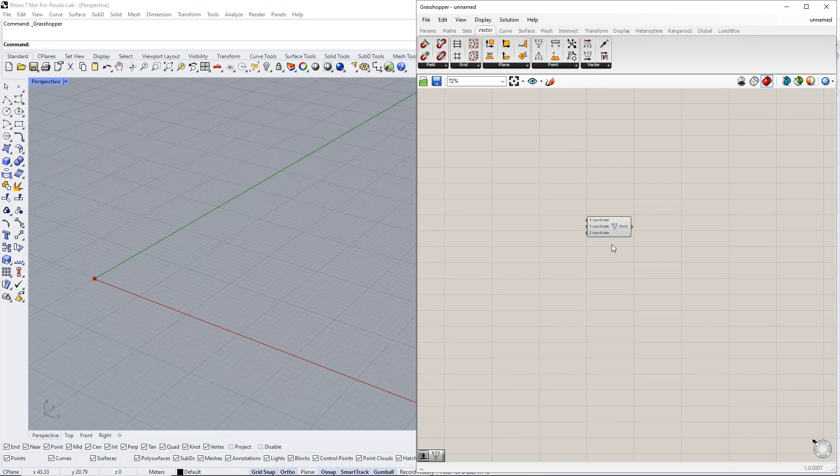First, we create a point using the Construct Point component from the Vector tab. Afterwards, we copy this point twice by holding down the Alt key and dragging the components. For the second, we set up a range to the x-coordinate, for example, from 1 to 50. We then enter width for this slider name.

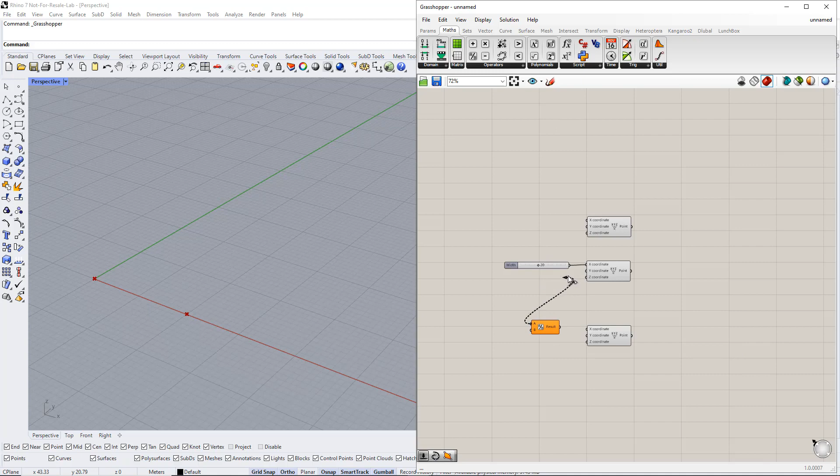We would like to set the third point in the middle of these 2 points, but with variable height. The x value has to be the x value of the second point divided by 2. To do that, we insert the division component from the Maths tab. Now, we connect a to the number slider. For b, we enter 2, using the panel command.

Afterwards, we set up a new range for the z-coordinate, for example, from 0 to 10. After that, we enter height for this slider name.

In the next step, we create a curve from these points using the Interpolate component. You can find it in the Curve tab. Afterwards, we plug the 3 points into this command. Make sure you use the right order, as shown here.

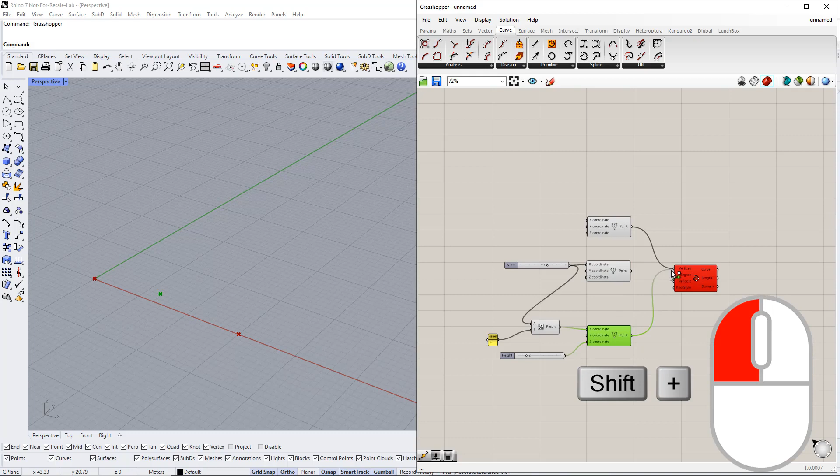We can also define the curve degree using the Number Slider command. We set up a new range between 1 and 5.

Next, we copy this curve in the y direction using the Move component. We also insert the unit vector parallel to the y-axis component. Now we set up a new range, for example, from 1 to 100. Then we enter length for this slider name.

After that, we create a surface through these 2 curves using the Loft component. You can find it in the Surface tab. Then we connect these curves to the curves in the Loft component.

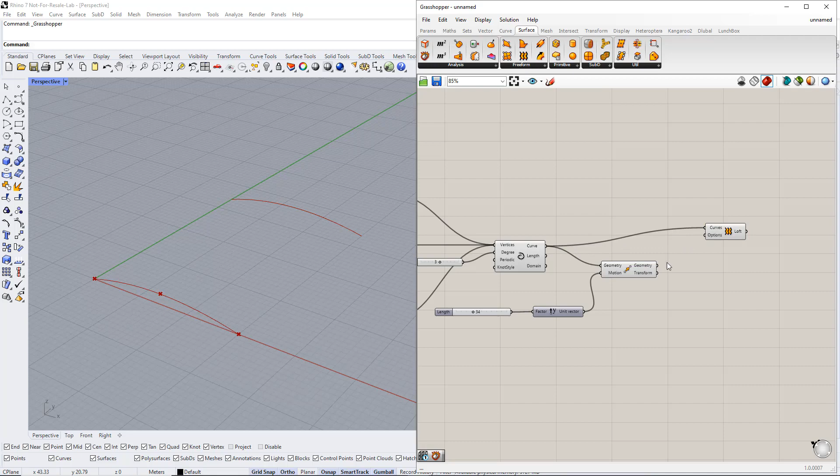In the next step, we create a space truss structure on a surface using the Space Truss Structure 1 component. You can find it in the Lunchbox tab. Then we plug the Loft component into the surface in this component.

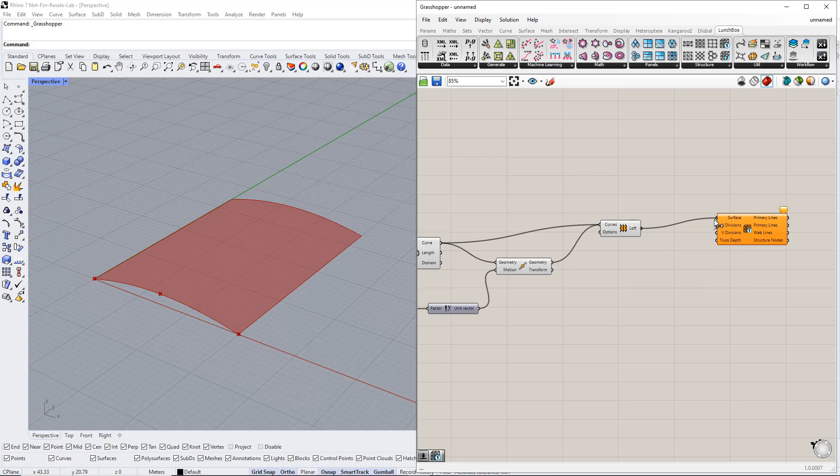We also need to set the divisions in this surface in the U and V directions. For this, we set up new ranges, for example, from 1 to 20 for both directions. After that, we set up a new range for the truss depth, for example, from 0 to 5.

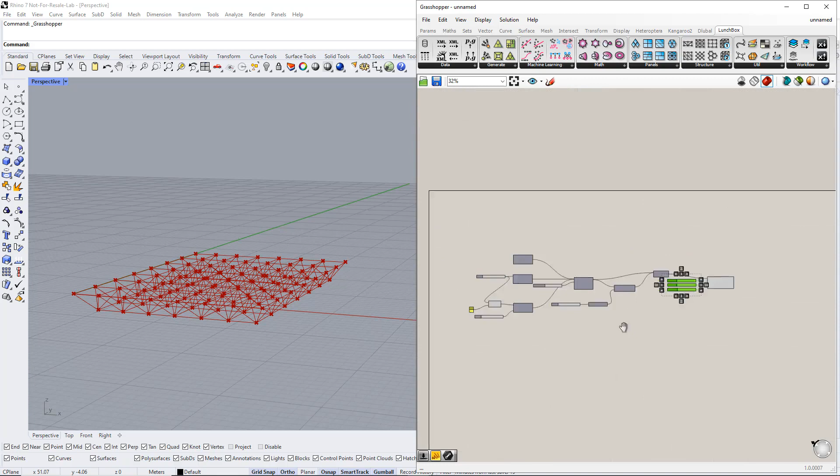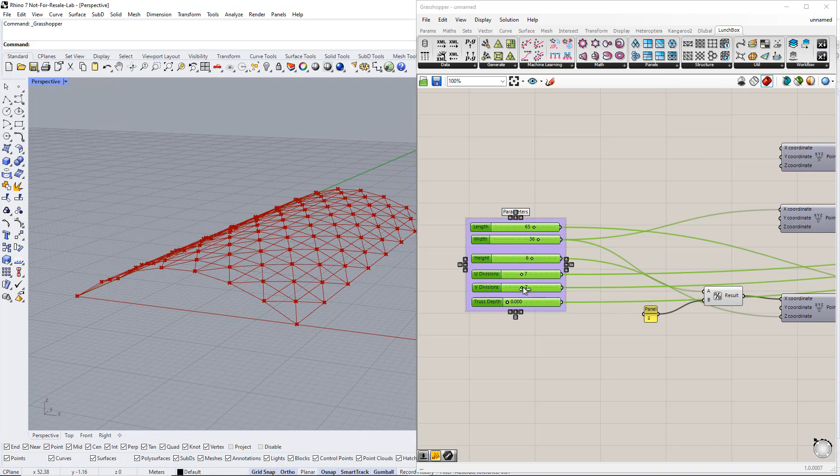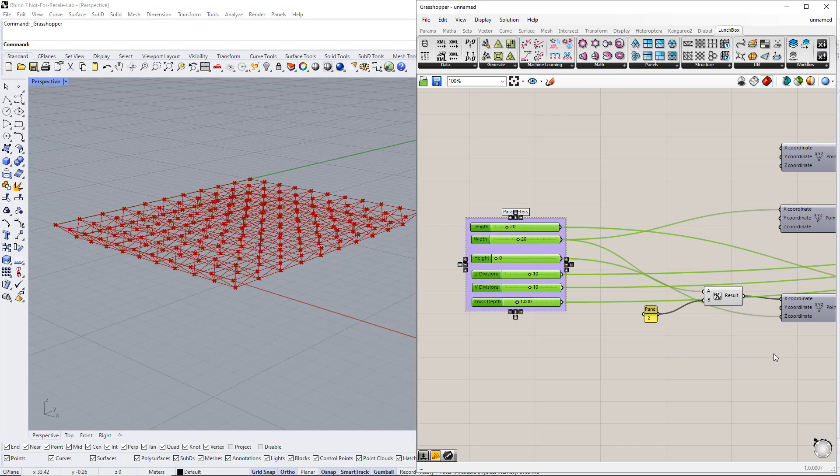Next, we put all the number slider commands together in a group to control all the parameters easily. Then we enter parameters for this group name. We can see which lines exist in these options using the line command.

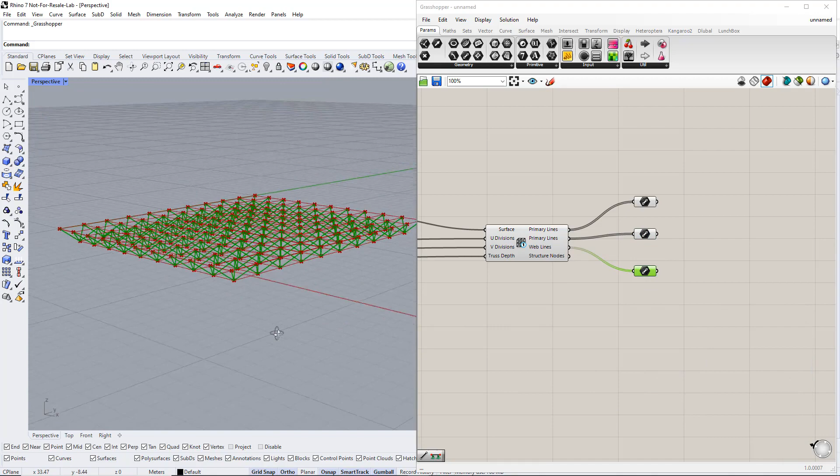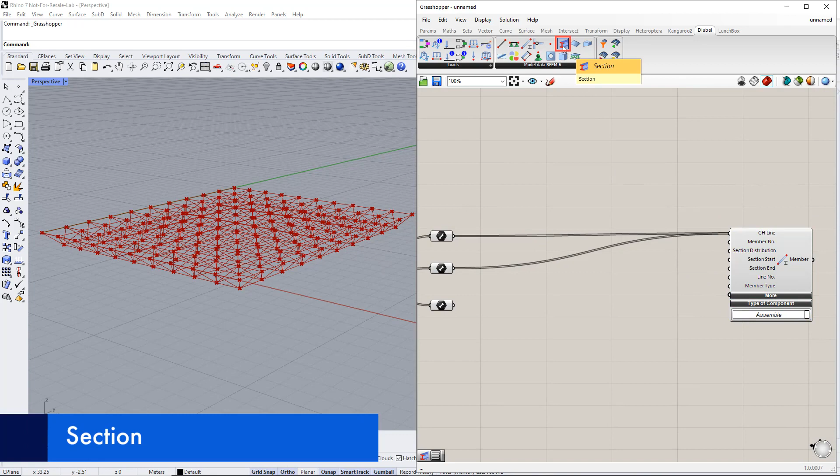Now we assign members to these lines using the Member component in the Dlubal tab. Then we connect the lines for the upper and lower chords to the Grasshopper line in the Member component. In the next step, we define the cross-section using the Section component in the Dlubal tab. Then we enter number 1 for the cross-section number. And CHS 88.9 times 5 for the section name.

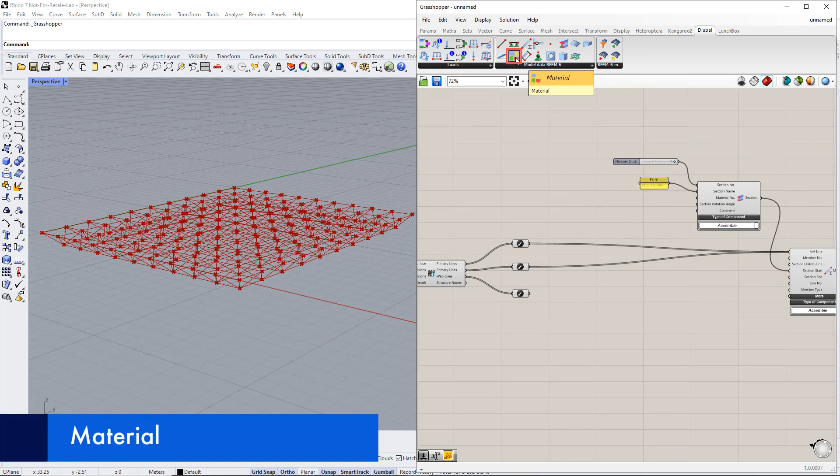Afterwards, we define the material using the Material component in the Dlubal tab. Then we enter number 1 for the material number. And S355 for the material name. For the remaining members, we assign another cross-section. Therefore, we copy both the member and the section components. We have to change the section number to 2. And the section name to 76.1 times 5.

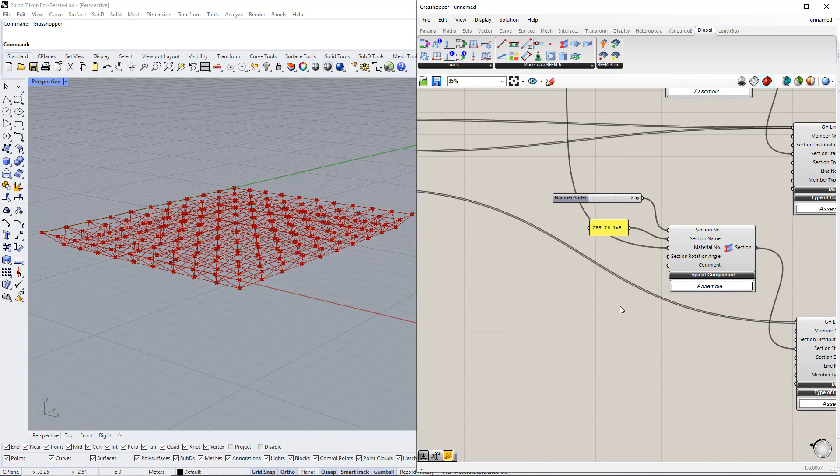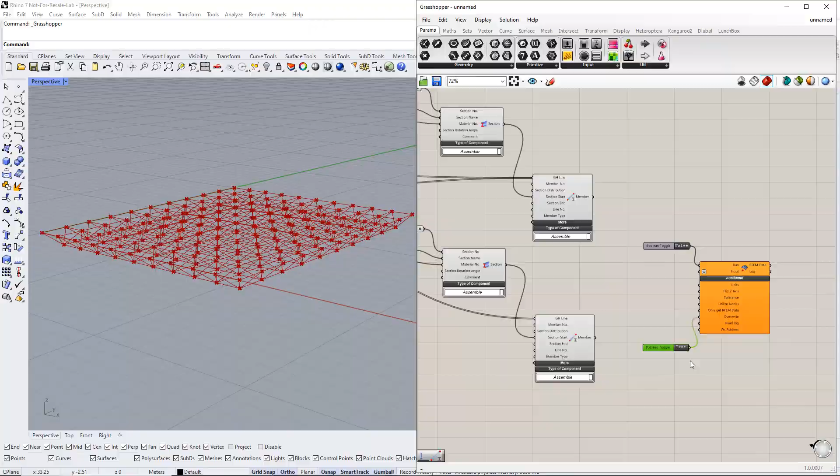Next, we transfer these model data to RFEM 6. We have to insert the RFEM 6 export component from the Dlubal tab. To start the export, we use the Boolean toggle command. We will also overwrite the previous data in RFEM by using the Boolean toggle command and switching it to true. After connecting all the components to the RFEM 6 component, we double-click the Boolean toggle command to perform the export.